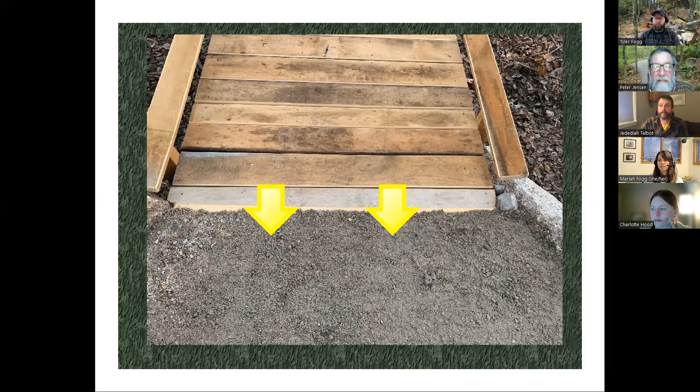Okay, there are also these conditions for exception in the trail accessibility guidelines, and there are 4 of them. This is where it's not practicable due to terrain. So what it does is provide all these 4 exceptions - they provide an out for certain pieces of these technical specifications. For example, you might be able to achieve the width and all other 9 or 8 of the treadway-oriented specifications, but maybe you can't make the grade work because of the terrain, and so this is where there could be an exception to that.

Fundamentally alter the function or the purpose - the best example I can give there is, say, in an alpine area, having to import surfacing material because there's nothing else to use in that location. That would really alter the purpose of a trail in an alpine area.

Prevailing construction practices really relates to who's going to build the trail. Perhaps those that are going to build it - let's say a volunteer group, for example - they may not have the expertise to drill and remove ledge, or that type of thing. So there is an exception in there for that as well.

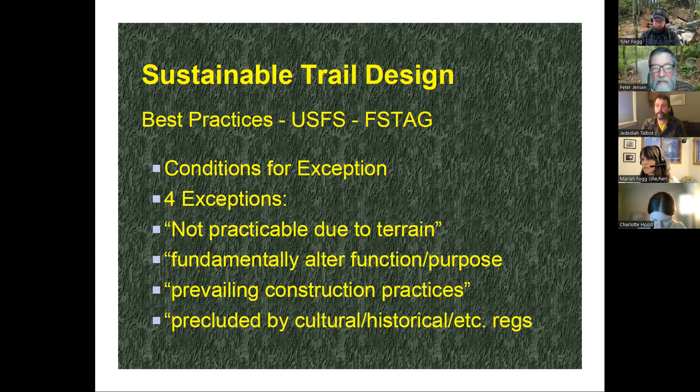There are also two general exceptions - I'm just highlighting those, I'm not going to get into those. There's a lot of information here. Generally speaking, this is a whole day class that I do, so there really isn't time to dive into this.

So in terms of design and layout, we're going to look at some of the trail parameters - slopes and grades, process, and then also the final aspects of putting a plan together. Objective purposes of the trail - the objective or purpose of the trail, destination, why are you having this trail? You also want to be thinking about what kind of width you would like to have, and the type of surface. And certainly we want to build in sustainability as well - I'll talk more about that in a minute.

And then who's going to build a trail? Is it going to be volunteers, staff, contractor, or some kind of hybrid combination of that? And the same thing goes for maintenance - that's another important aspect of this.

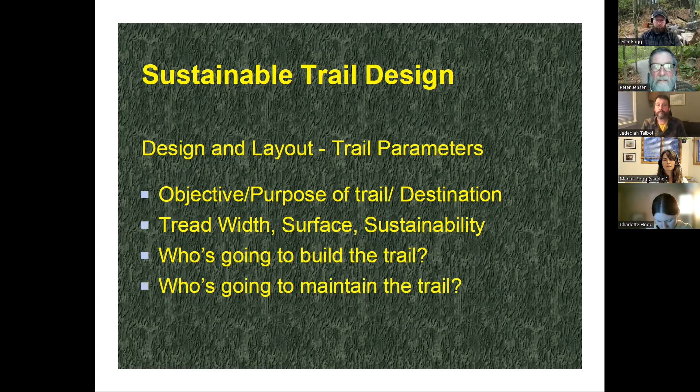So in terms of destination or purpose of the trail, are you trying to get up on top of a hill or a mountain? Are you trying to navigate around a wetland? What are the parameters that you're trying to figure out there?

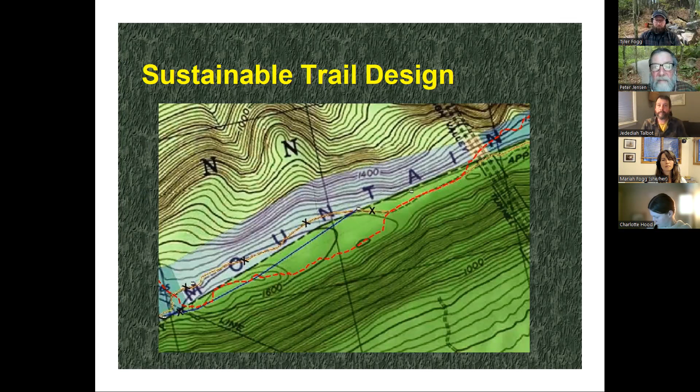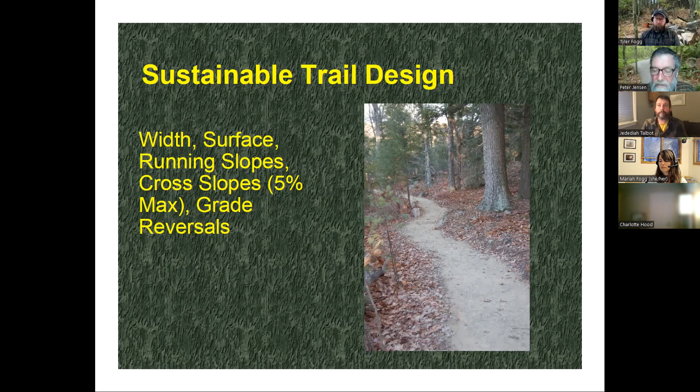Important things in my mind are the width, the type of surface, running slopes, which includes the cross slope as well. The cross slope is a 5% maximum. And then we start introducing sustainability design, and that has to do with grade reversals. We're going to talk a little bit more about that. So again, who's going to build the trail and maintain the trail? These are important considerations when you're making your decisions on moving forward.

Rest intervals. There's a requirement for rest intervals at the bottom and top of what we call, say, 4%, and we've got to increase to 7.5%. That 4% section results in a rest space because it's 5% or less for at least 60 inches. And so once we get above that section of say 7.5%, we can't go to anything steeper, above the 8 1/3, without first going to a rest in that section.

I'm probably losing a bunch of folks because this is getting pretty technical, but here's an example. I came up with a sample section: 4% for 55 feet, 7.5% for 23 feet, and there's a negative 6% for 9 feet. And then we go up again for 3% for 6 feet, 9.25% for 18 feet, and then down again 4%.

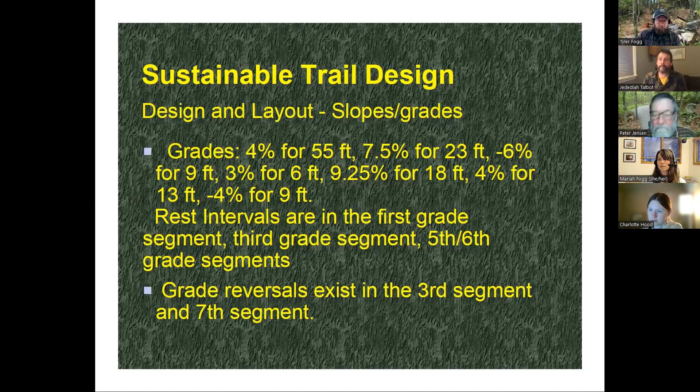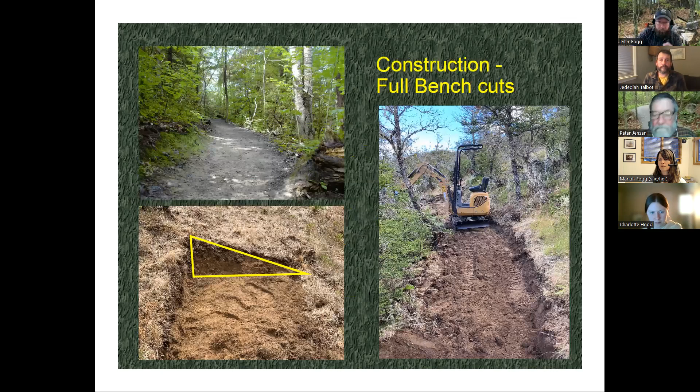A lot of this work requires bench cut, and I know Jed's going to talk more about that, but I wanted to give a quick example of that. So onto process: we lay out a flag line, typically using a clinometer, so we can get a rough idea of what's going on.

Then we review that with the client. We modify the alignment if it's needed based on input, and then get into construction work logs and cost estimates, so that's sort of in preparation for the creation of a trail plan and fundraising purposes. The construction work log also helps in terms of information for permitting if any is needed. And then based on permitting, if that does occur, there could be additional modifications made due to permitting.

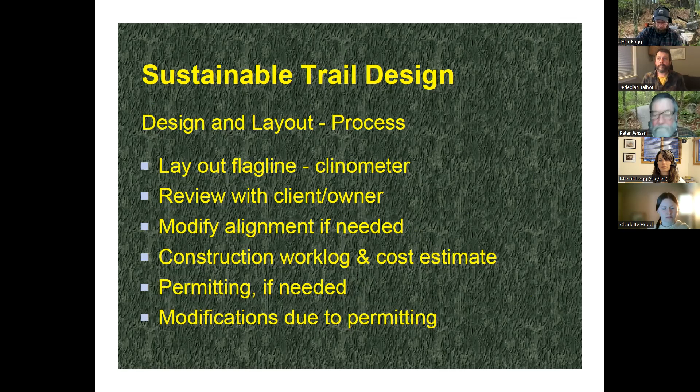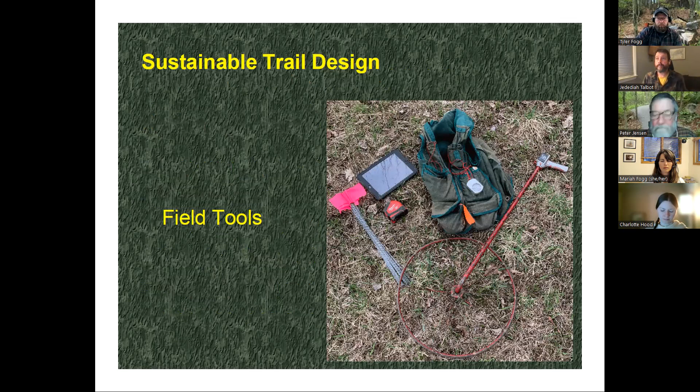Some of the field tools: flagging tape, pin flags, depends on the conditions, if it's open field versus woodland, a wheel for doing the work logs, clinometer. I use an iPad for recording information. And then route marking, flagging, that can be done in a number of different ways. I have a particular system that I use, which I won't get into at the moment.

The other thing I wanted to mention was the science behind sustainability. Dr. Jeff Marion, who's down at Virginia Tech, and also one of our PTBA members, Jeremy Wimpey, they created this document after assessing the entire Appalachian National Scenic Trail and came up with information on sustainability. And basically this graphic here pretty clearly illustrates that if you have a fall line trail, you're going to experience entrenchment.

It doesn't matter how much cross slope you have, how many drainage structures you put in, that type of thing — you're going to end up with entrenchment. So that's where we're really looking at more of the side hill located trails to alleviate the potential for erosion.

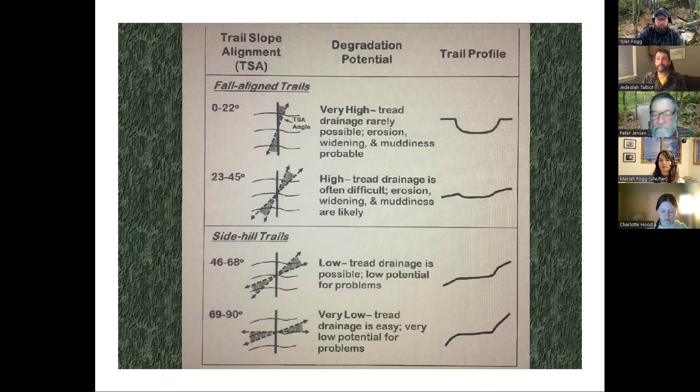Here's another graphic I use to illustrate. The vertical line is the fall line, and the level shows the contour or angle of the treadway you could have. So in the left photo, if that's a fall, the silver rod is going straight up. Whereas on the right, we're using the half rule, which is half of the prevailing slope. For example, if you have a slope of 15%, your maximum grade should be 7.5.

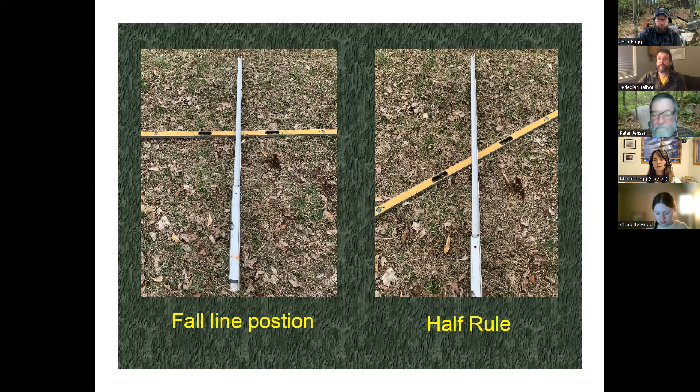Here's an example of laying out grade stakes, which you sometimes have to do on these types of trails in order to raise the treadway to make grades work. In this particular case, it would be to get by this pine tree on the left, and it would also help protect its roots.

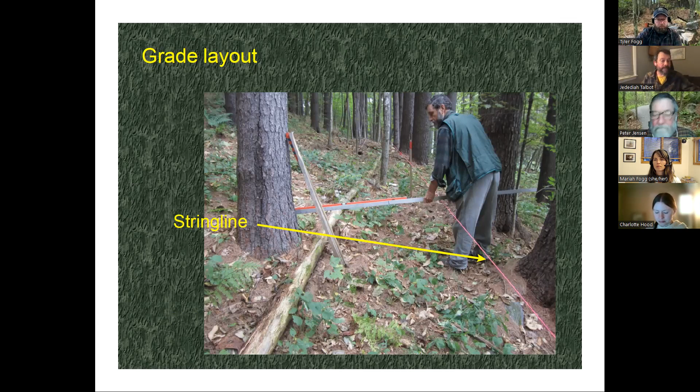The goal is to create trails that, for the most part, lie lightly upon the land, and provide trail users with a positive experience, getting as many folks into the wooded landscape as possible, whether it's wooded or through open meadow.

There's a lot of synergy in creating trails like this, with input from community groups, and people love it. I always abide by the adage, build it and they will come. I think those of you out there who have built these types of trails can attest to that.

I believe that's all I've got at this point. So thank you for your attention.

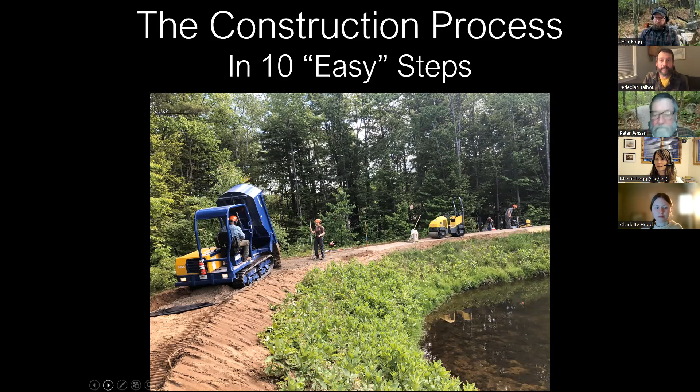So we can go to the next slide. We'll talk really quickly about the anatomy of an accessible trail before we get into construction. This is a basic diagram showing what a typical accessible trail might look like. Moving from left to right on the screen, you can see the original grade, that's the landscape, and then the undisturbed soil around the trail itself that's been excavated out.

We start with a crushed rock base, and that's not always the case. You see it's listed as 0 inches to 24 inches. Sometimes you don't have to put the crushed rock in. That's basically drainage stone, generally 1.5 to 2 inches as a max size, but it can go a little bigger or smaller. It doesn't have fines in it, so it lets water pass through. If you're in wetter environments where water is percolating through, seeping, or there's any subterranean flow, you generally want to put in crushed rock. However, it's not always necessary, and in a lot of environments it's not needed at all, so sometimes that layer is eliminated.

Then you've got some geotextile fabric, and on top of that what's shown as our compacted surfacing matrix, that's 4 to 6 inches as an absolute minimum. Oftentimes it ends up being more than that. And this is also, I should say, a bit of a simplification.

Sometimes we put in another layer of slightly larger gravel, what people generally refer to as 3/4 inch minus gravel. It's usually less expensive and packs really well. Then we use that surfacing matrix on top, absolute minimum 2 inches, but usually 3, 4, or 5 inches or so. We'll talk more about what that matrix is a little later.

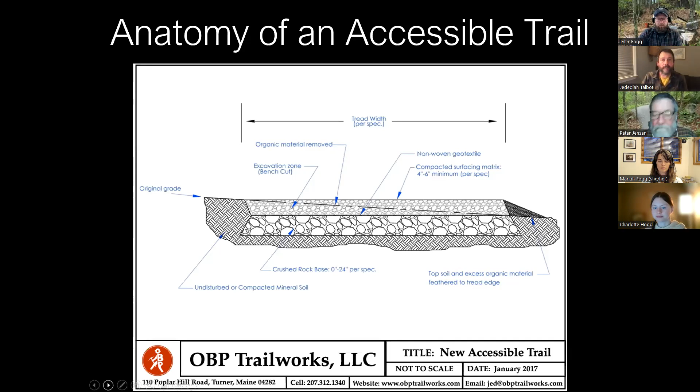Step one in constructing an accessible trail is the initial design and layout. It's almost like a feasibility study of whether or not it's prudent or feasible to build this type of trail on the parcel you have. Usually that means going out with clinometers to measure grades, doing a lot of scouting and running around.

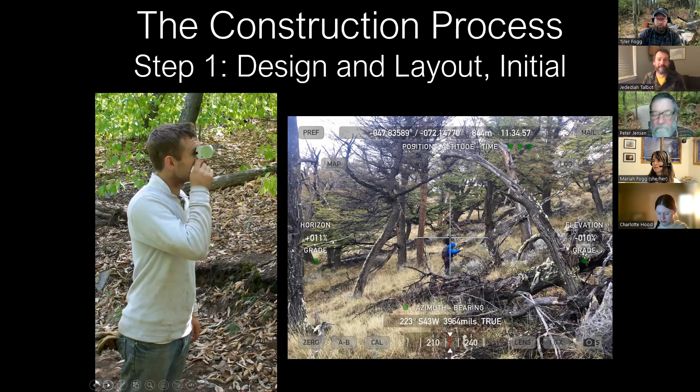After that initial scouting and design assessment, you can say yep, we're going to move forward, or maybe this isn't the area to build an accessible trail. If you are going forward...

We get into a more refined layout process. I think Peter showed a nice slide with grade stakes, string lines, and a piece of angled aluminum with a level on it. That's kind of what we're doing here. If you look at this hillside, we're trying to go up the hill without going up a fall line alignment like Peter was talking about. We had some grade issues, so we had to sweep our turns.

So we lay out our grade stakes along an alignment that works, marking with a Sharpie or something the actual finished trail grade on each stake, and you can put a string between them if you'd like. That helps guide the excavation and filling process—how much excess excavated organic material to put on the sides, how much to build up the trail, or how much to entrench it into the landscape to achieve the final grades you're looking for.

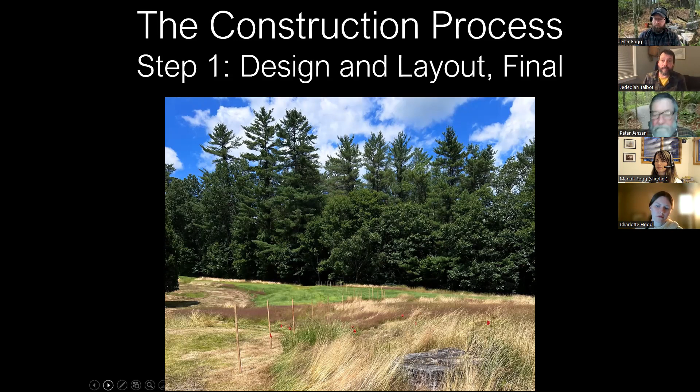We sometimes also use flagging tape, not in the traditional sense of marking trail corridors or hiking trails, but to actually flag areas not to be disturbed, or areas to be disturbed on the other hand. This is a project we're working on with a landscape architect, and they were really interested in preserving these islands of vegetation, so we wrapped them with tape and made sure nothing was touched inside those areas.

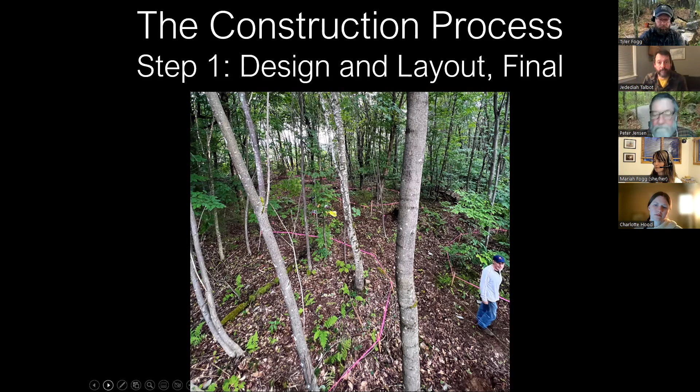If grades aren't an issue, like when moving through a fairly level field, we'll just use pin flags, or wire stake flags as they're sometimes known. That way you can set the width and know exactly where you're excavating. The depth can vary a bit and won't necessarily be too problematic. You get a really good idea of where your trail is going to be, leaving less wiggle room up to the excavator operator. We usually put those flags about every 5 or 6 feet—we call it tight flagging.

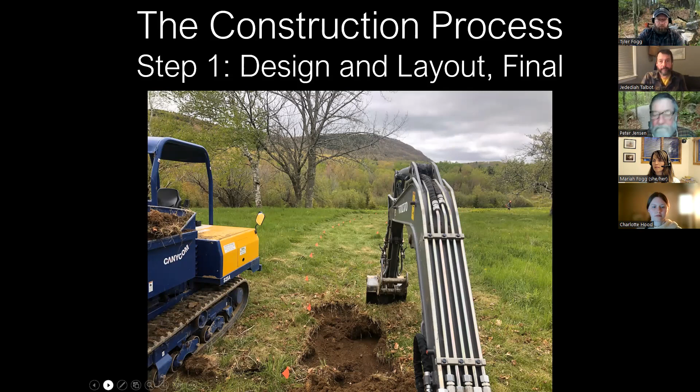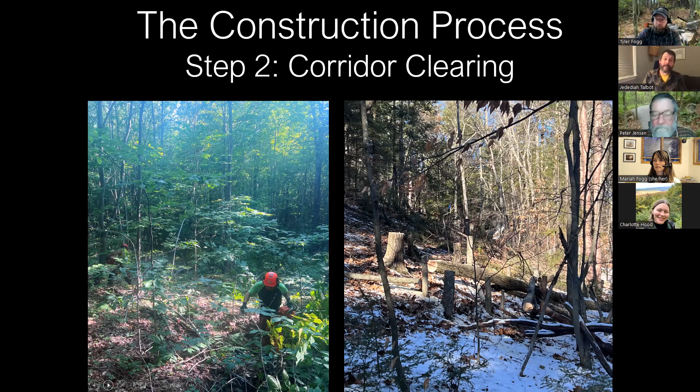You can see the picture on the left. We're going through some pretty nasty invasives, so we had to utilize some equipment to cut through that. The slide on the right is much more conducive to opening up a trail corridor, and it was done primarily with pole saws and hand saws.

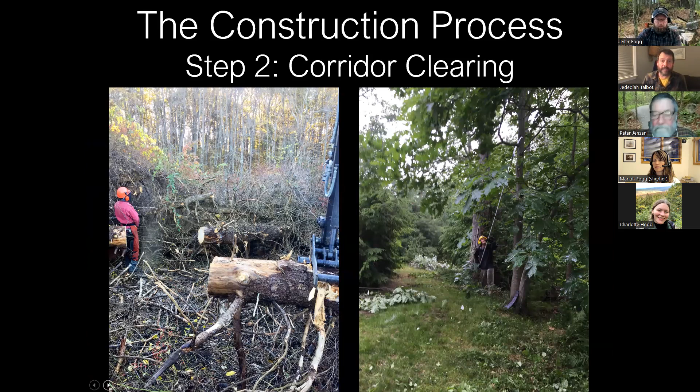Then we have to prepare the trail bed for excavation. Although this step isn't 100% necessary, it results in a much better overall process. I utilize everything as a resource out there when we're building trails, so we try to utilize everything that we possibly can. I call it rearranging nature - a lot of times we're just really rearranging what we have in front of us.

So we'll take all of that nice leaf litter, light organic matter, and we'll either rake it off - we'll start by cutting as low as possible, sometimes that's why we bring in the brush saws. Then we will use rakes or a leaf blower to blow it off the trail, either into piles or into some organized fashion where we can utilize it later for the naturalization process. It works as mulch and also as a great way to naturalize. We'll see some photos of that in a little bit.

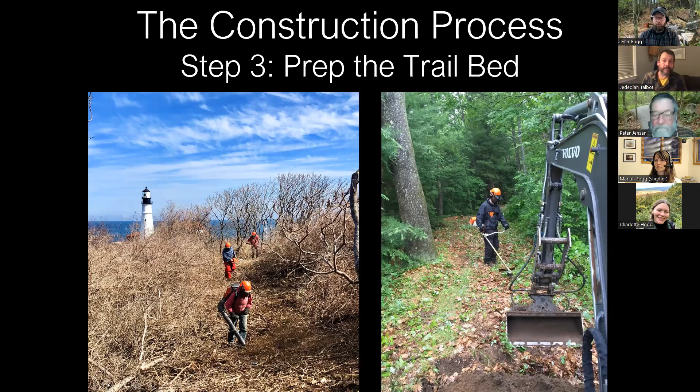Okay, when we're working through fields, we often mow as low as we possibly can to the ground with mowers, blow all that grass off, and then we use what's called a power box rake, or better known as a Harley rake, to masticate the soil. So instead of having these root mats, these large vegetative mats, we turn it up into a really nice loamy mix that has all the seed source in it.

I think you can click on a short little video here. Oh, it's loud, I guess I can't talk over it. Fortunately, it's short.

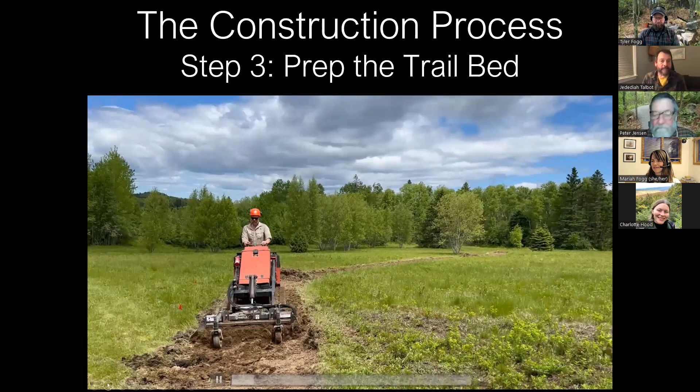That shows how we masticate the soil. This is another one, you don't have to play the video, it's more of the same. It basically makes the trail bed into a very workable, maneuverable, malleable loam full of seed source.

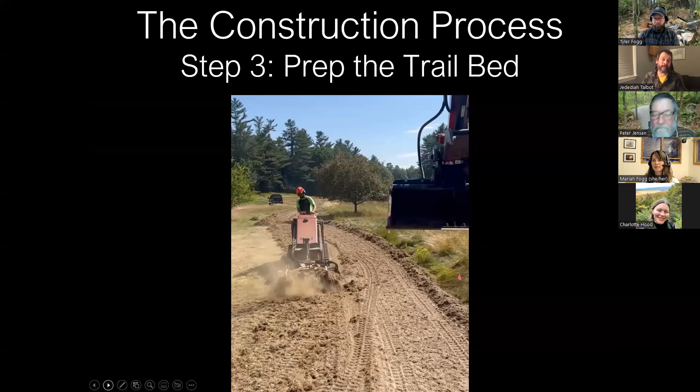And so we open up the corridor wider than we need for the actual trail tread so that we can feather our edges in during the excavation process.

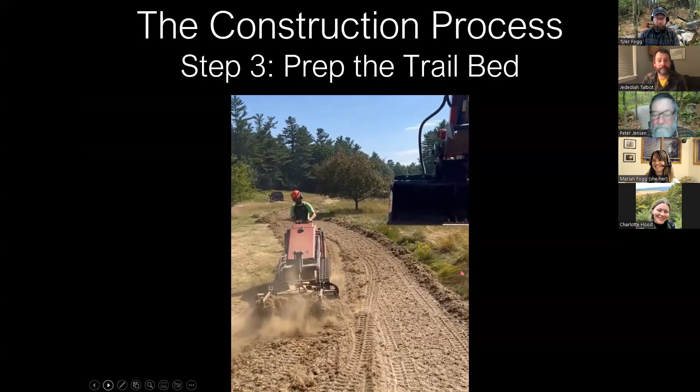So step 4 is to excavate and remove the organic layer. Ideally, when we're building accessible trails, we get rid of the entire organic layer and we're building off of mineral soil, or sometimes ledge or bedrock. But sometimes that's a little bit more difficult than in other places - sometimes there's a really deep organic layer, and sometimes it's really thin.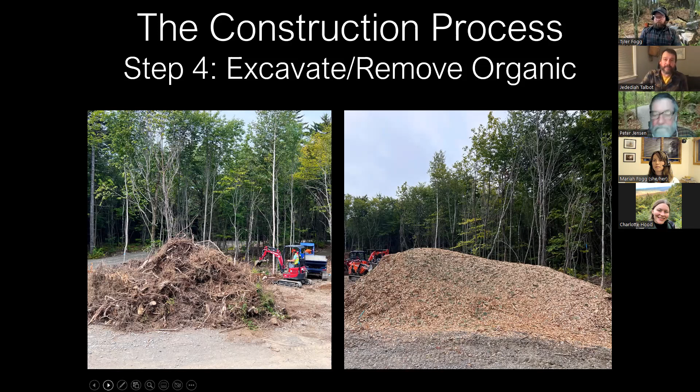This was a project where we were hemmed in on all sides, so we actually had to remove all the organic mass. We couldn't just drag the slash off into the woods, which is often what we prefer to do, and leave the biomass there. We generally don't chip in the woods, but occasionally we'll disperse chips. Generally we try to leave our slash in the woods whenever possible - that's the small diameter trees and the branches.

Step 5, building crossings, if you have any. If you have short little boardwalk sections or bridges or even box culverts, usually this is the time when we construct those. Even though we haven't brought much in for aggregate, we've got everything excavated. We need to be able to move machines back and forth across the trail, so we build our bridges. We usually don't put our railings on at this point.

We generally cover our bridges and boardwalks with plywood and continue to drive over them. We do all the rock work that's necessary around the sides, the cribbing work, and then we just continue to utilize them. So when you do it this way, you need to make sure your bridges and boardwalks are designed to handle the loads of your machinery going back and forth. Oftentimes we have to build our bridges bigger than what they would need to be for pedestrian traffic, just for maintenance and construction.

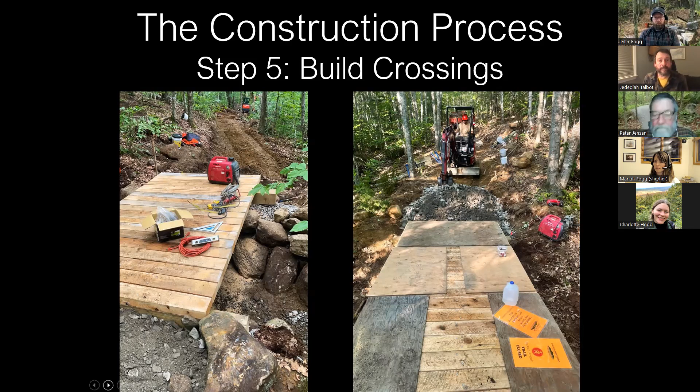Another shot of a crossing. You can see this is a very wet area that dumped out into a retention pond. This is behind a school. We had to build that crossing immediately, basically to preserve the runoff from the field, so we weren't adding any sediment to this pond.

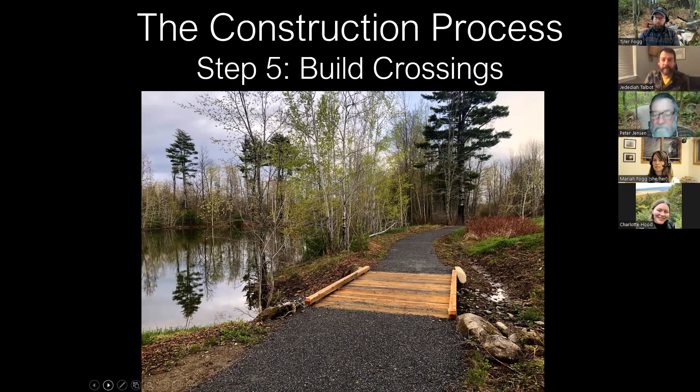Just an example of a small box culvert. It's a really easy way to get water from one side of the trail to the other without building really big structures. We do a lot of these. We've been doing a lot more of them in recent years - just easy little box culverts.

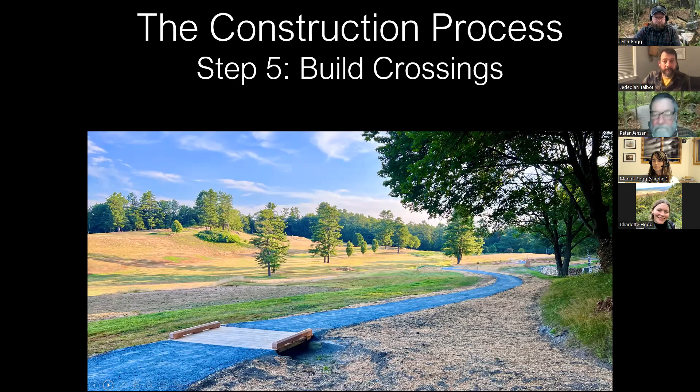Next step is to fill the sub base, install any culverts, or do other rock-based structures as needed, such as crib walls and retaining walls. The sub base is that larger drainage stone, used in areas that are going to take a lot of fill. So we want to build that stuff up first, and then we can lay our geotextile fabric on and bring in the next layer.

You'll notice with our culverts, when you put your culvert in, you also want to build your headers and wings - basically the inlet and outlet structures for a culvert. You want to make sure you're burying your culverts well, and we like to dress them up with some decent rock work around them so you won't actually see the plastic or metal culvert. When you utilize the trail, you just see the stones.

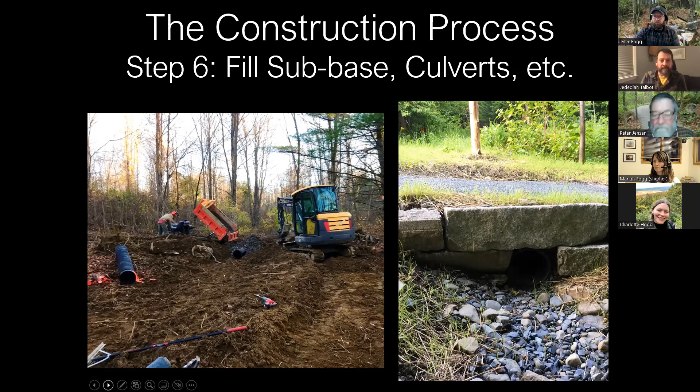More examples of drainage stones with the geotextile fabric going over it. We generally use a 4-ounce non-woven, perforated geotextile fabric, similar to what they call a 140N or equivalent.

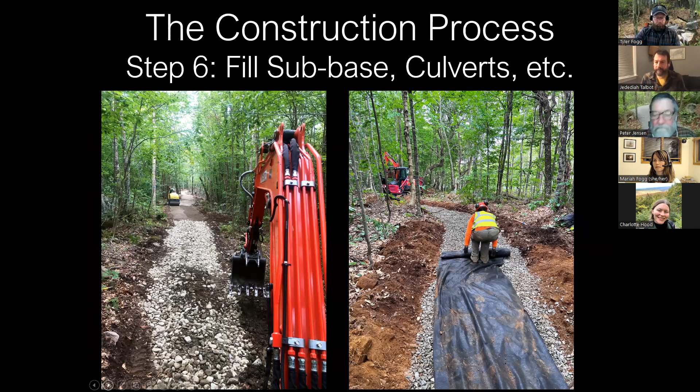More examples of crushed rock going in before the rest of the trail elements are constructed. In the picture on the left, we're actually building the rock work as we're filling with the crushed rock - we're building over ledge in this particular location. Anywhere we build over ledge, we always by default fill with crushed rock first, because water follows bedrock and ledge, so you're always going to get water flowing underneath your trail if you're building over ledge. You want to do what you can to mitigate that by putting in as much crushed rock as humanly possible.

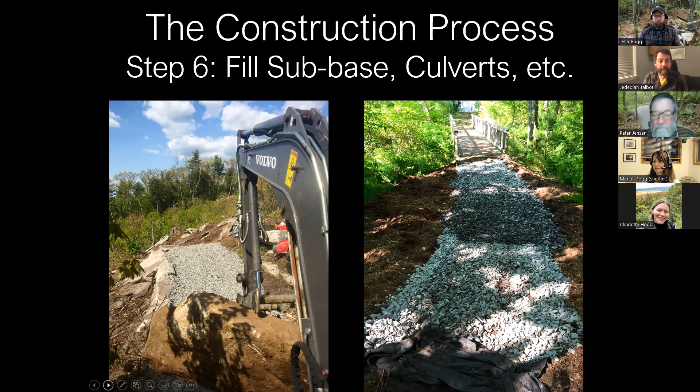And then you fill and compact your base. You can see this is a pretty deep trail we're building, about 14 or 16 inches of aggregate. So we like to compact it in lifts no greater than 6 inches at a time. We lay about 6 inches of material, rake it out roughly, you don't have to be too perfect with it, and then compact it, then lay another 6 inches, compact it, lay another 6 inches, etc.

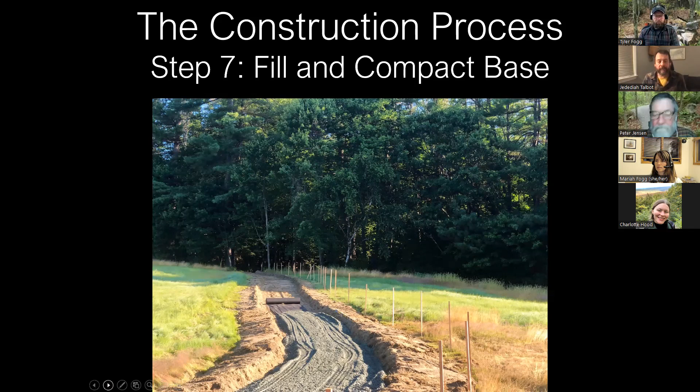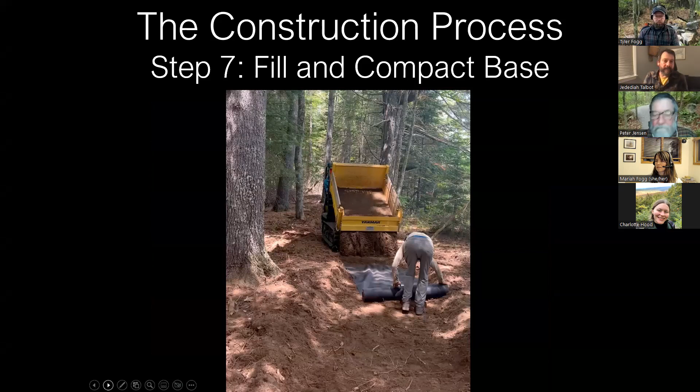Here's just a shot of filling some of the base with one of our machines. I think it's like a 4-second video. If you click play, Mariah. Very exciting.

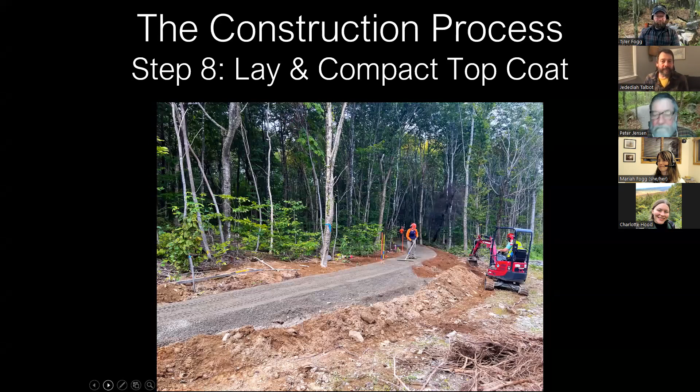All right, then we started installing the top coat, that surfacing matrix we were discussing before. As we install that top coat, we're really checking our grades with what we call smart levels, digital levels, to make sure they're still fitting what we need to do. We're starting to feather that organic material along the edges and bring everything in. We're also doing a lot of handwork, clipping all the roots by hand with hand pruners.

Being really particular about our edges, where the interface of our imported aggregate meets our organic material, is really important for a beautiful, aesthetically pleasing trail. It also helps focus the way water comes onto your trail and off your trail, so it serves two purposes. The trail on the right, we'll be talking about drainage a little bit. We purposefully aligned that trail right on the edge of that grade break because it was really easy to shed water off of it.

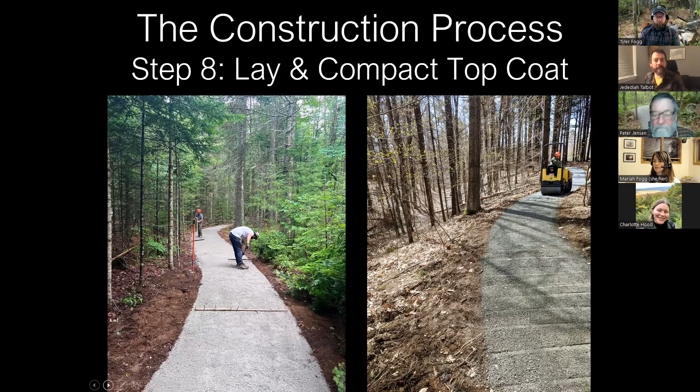The picture on the left, you can see that top coat being compacted in the background, and in the foreground you can see our base material, which is different, sort of regular looking gravel, and then we've got the fancier looking nice stone dust aggregate as a top coat.

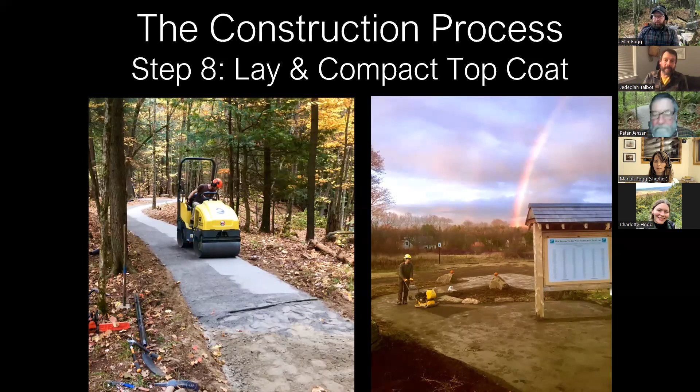It's important to mention, as highlighted in the photo on the right, that moisture is really important for the compaction process. There isn't going to be the ionic charge between particles that binds them together without moisture. So in order to get compaction rates as high as you need them to be, we need to compact when there's moisture. Generally it's right after a rainstorm. Sometimes you get the benefit of a rainbow.

Sometimes it doesn't rain. There's a project we were working on this summer where it didn't rain for the 6 weeks when we needed it to. So we actually had to bring water in. We went to a local pond that we could drive our UTV to, pumped water into a tank, brought it to the trail, and watered the trail in order to get the compaction rates we needed. Took a lot longer, but it was necessary.

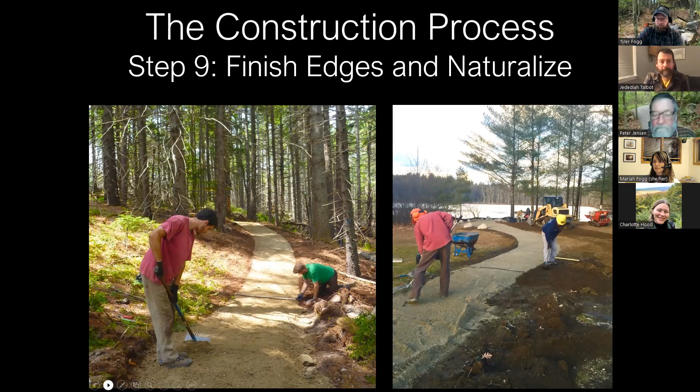Again, finishing the edges, and then we finish that off by taking all of that leaf litter that was raked off at the start of the process, and we bring it right back into the trail edge.

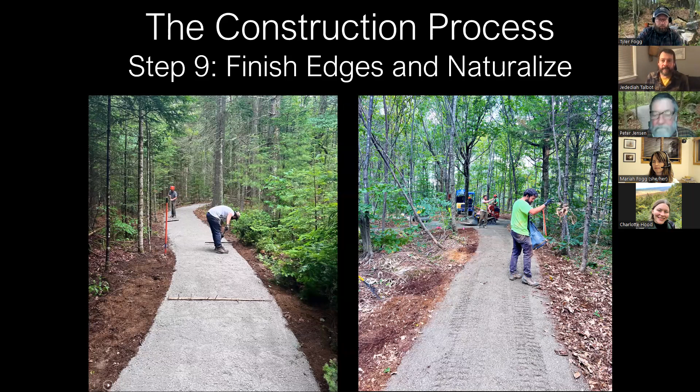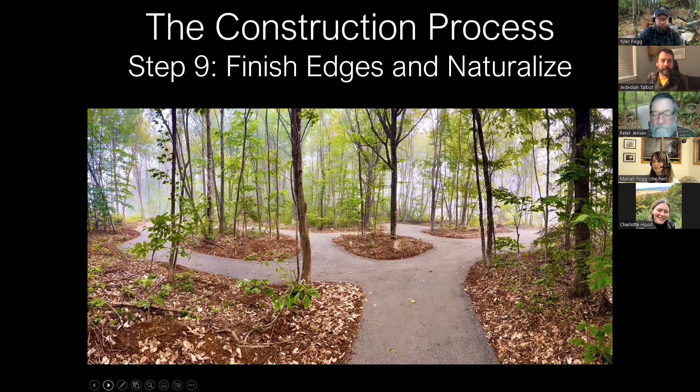This is a photo of a completed trail, I think the day or within a couple days of finishing. So we try to make it look like it's been on the landscape for a real long time and have everything blend.

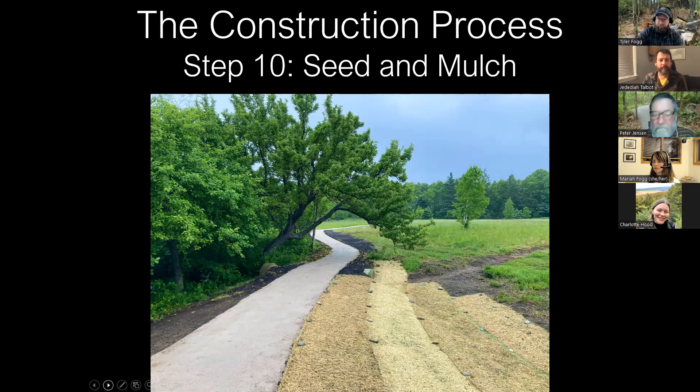Finally, we seed and mulch in some cases, not in every case. When we're in the woods and you don't want to import a seed source or bring something in that wouldn't naturally be there, oftentimes we just use the native seed source we've got in the organic layer and mulch with leaf litter. Sometimes, like in this picture, we're using Curlex blanket over imported seed. We weight it down with rocks because I personally don't like to keep it there forever, I like to just lay it down and pull it back up. There's this green polypropylene woven through it, supposedly photodegradable, but I prefer to just get it out of the landscape as soon as we start to see grass sprouting up through it.

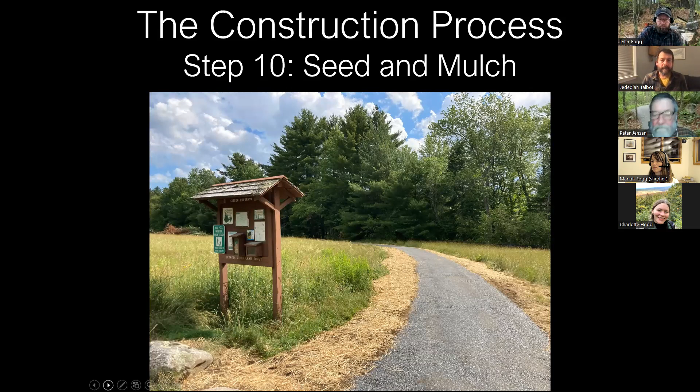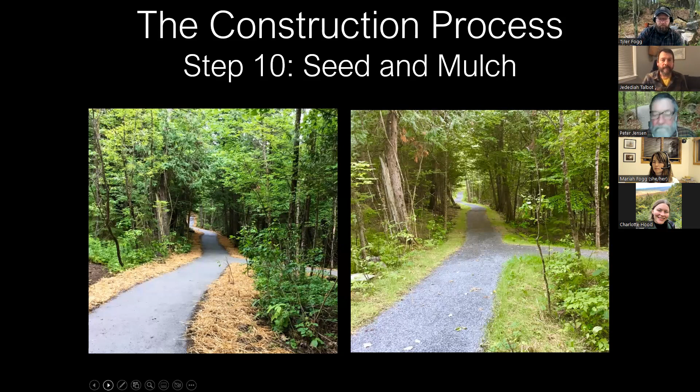So just some real quick tips and advice.

When you're laying out your trail, try not to push your grade limits. So those grade segments that Peter was talking about, if you're working in that area of say 5% to 8 1/3% grade, don't lay your trail out at 8%, because if it goes to 8.5, you've pushed out that grade segment. Through experience, I found that the trail you build is always just a little steeper than the trail you lay out. To avoid those conundrums, don't push grade limits during the layout process.

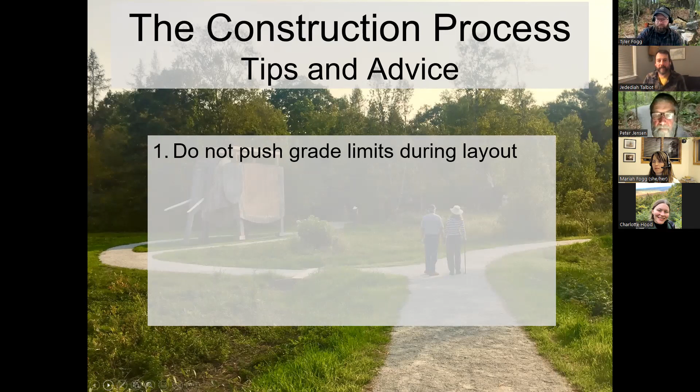Next, source the best surfacing matrix that you can possibly find. That's usually what we call stone dust, a 3/8 inch minus aggregate. It needs to be angular, and it needs to have enough fines in it that really bind. Also some binders, so a little bit of clay content is good. I've been known to mix as many as 3 or 4 different types of aggregate together to create a surfacing matrix if a local quarry doesn't have something suitable, because really the quality of the surfacing matrix can make or break your accessible trail.

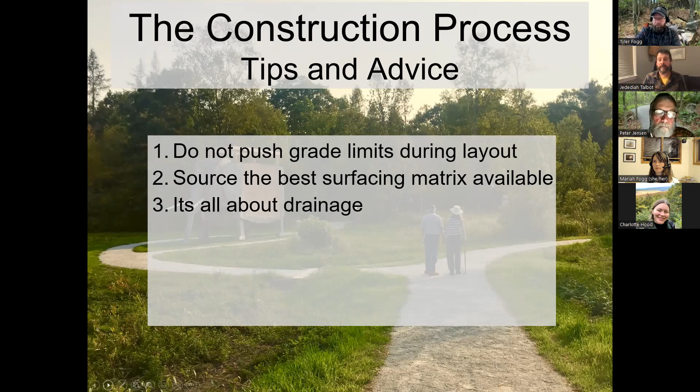It's all about the drainage. Can't emphasize that enough. It's the way the water moves onto your trail, moves off the trail, and acts when it's on your trail. Everything we do, we're focusing on the water, the immediate watershed of your trail. When there's any precipitation event, how is water getting on, how is water getting off, and what's it doing when it's on your trail. Can't emphasize that enough. It's easy to build an accessible trail. It's hard to build an accessible trail that drains really, really well.

Beware of the shoulder seasons during construction. It's best not to be building during freeze-thaw cycles, because that really throws off your compaction. It's also usually when the weather is less predictable. Also, first thing in the spring, things tend to be really wet, although seed takes nicely then. Anything you do very early season or very late season will probably need to be revisited a little bit later.

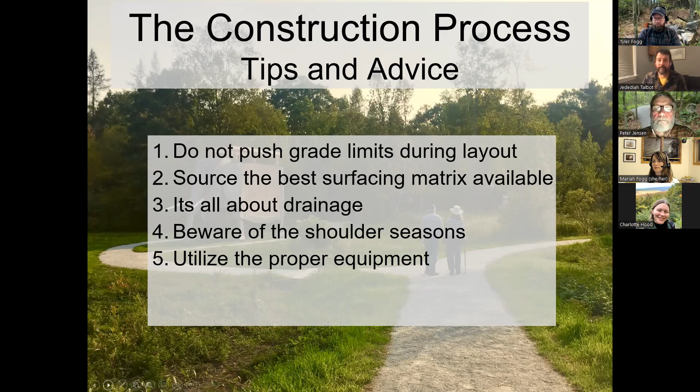Utilize the proper equipment. We generally use tracked equipment built for the task that's no wider than our finished trail during construction. During maintenance, similarly, you want to make sure you're using equipment that's sized for your trail.

Know the value of hand finishing. I think I emphasized that a little bit. It's every part of the process. It's clipping all the roots during the excavation. It's making sure that the roots are sawn. We have dedicated saws for roots, so that we're making as surgical a cut on every tree and branch as possible.

And finally, plan on maintenance. Build maintenance budget into your trail project. Know that once it's constructed, you're going to have to continue that investment with both labor and hard costs, in terms of getting out there, seeing it, adding some extra material, having that material on hand. We'll talk a little bit more about that in Tyler's section. And I think that's it.

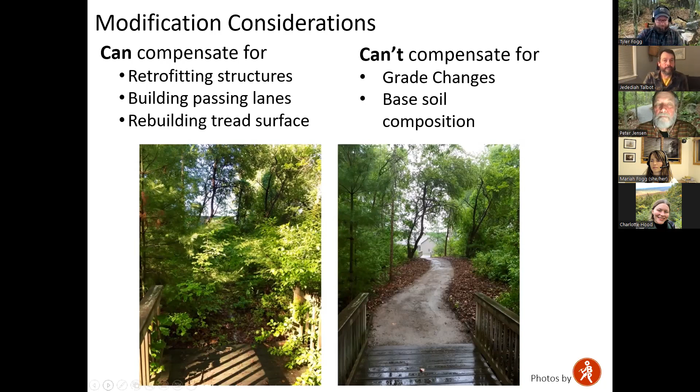I'm going to talk a little bit about the maintenance issues that we're seeing as a land trust that manages accessible trails. BNRC maintains or is restoring to specifications about a mile and a half, or about 8,000 feet, of accessible trail. The infrastructure on those trails includes bridges, boardwalks, and the transitions from those to surfacing, as well as all the different grades encompassed in those trails and the surfacing itself.

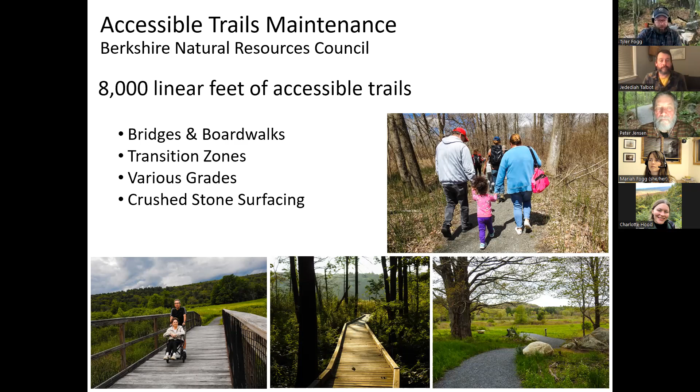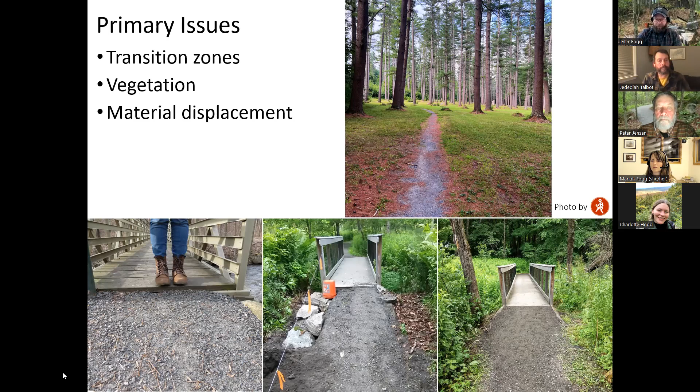Next slide. So what we're working through right now is thinking about our takeaways as we've been managing these trails. We need to develop a specific maintenance plan for trails that we're maintaining to these accessibility standards. That means adding to our logistical capacity, but also making space in our stewardship philosophy.

What's a reasonable expectation of accessibility? Different styles and types of trails have a different expectation, and there needs to be an expectation of full access on these trails, as opposed to an expectation that there might be a muddy section, blowdown, or some other type of barrier. It's also important for trail conditions in the field to accurately match the information we're sharing about them on our website and in resource materials like the Trails for All guide.

So some of the things we're building into our trails program are increasing our rate of monitoring and inventorying these trails, which allows us to respond to trail condition changes that affect accessibility. Having material available for gravel surfacing for small projects is important too - we've found it's a challenge to source material quickly and in small amounts, so having a stockpile is useful. And then addressing needs for equipment, efficiently moving and compacting surfacing materials.